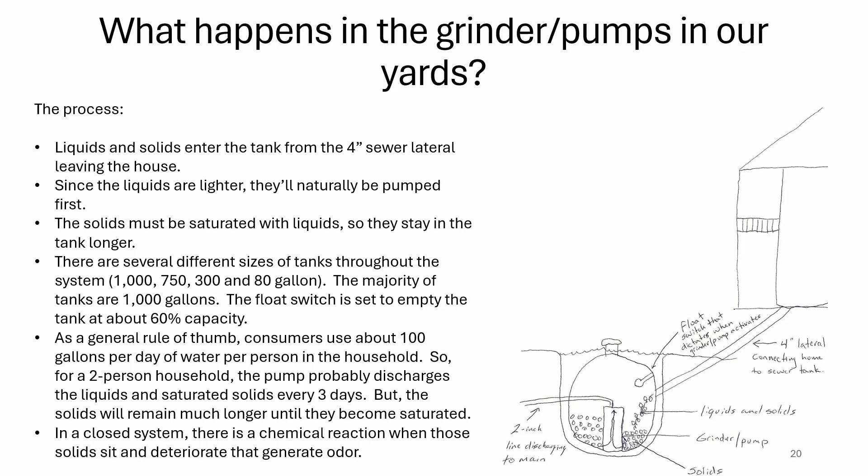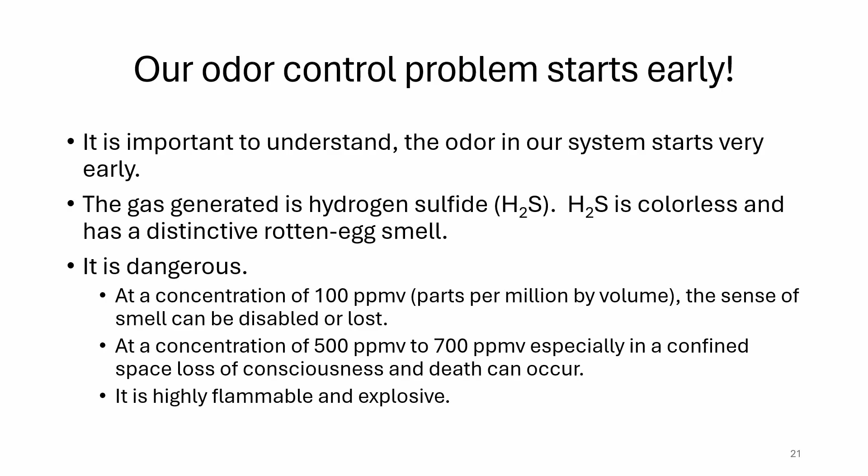In a closed system, there's a chemical reaction when those solids sit and deteriorate that generates odor. So our odor control problem starts really early. The gas that's generated is hydrogen sulfide, H2S. H2S is colorless and has a distinct rotten egg smell. It's dangerous. At a concentration of 100 parts per million by volume, the sense of smell can be lost. At a concentration of 500 to 700 parts per million by volume, especially in confined spaces, a human can lose consciousness or even death can occur. It's also highly flammable and explosive.

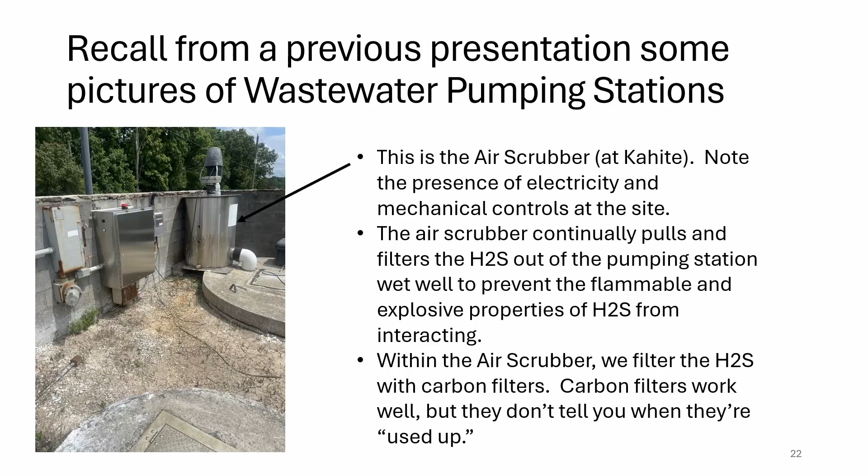Recall from a previous presentation some pictures of the wastewater pumping station. This is the air scrubber at Kahite. Note the presence of electrical and mechanical controls at the site. The air scrubber continually pulls and filters the H2S out of the pumping station wet well to prevent the flammable and explosive properties from the H2S from interacting. Within the air scrubber, we filter the H2S with carbon filters. Carbon filters work well, but they don't tell you when they're used up. They also treat H2S at a rate of significant deterioration. So the more H2S that's in there, the faster the carbon will expire.

And so part of the reason we get odor complaints is because we change the filters on a regular basis, but depending on how much H2S is in the system, sometimes those carbon filters will last 2 weeks, sometimes a month, sometimes 45 days, but they don't alert you to the fact that they've lost their carbon properties or been expended. And that's why we a lot of times encounter odor complaints. So do we have an odor control problem? Yes, and a lot of you probably knew the answer to that question.

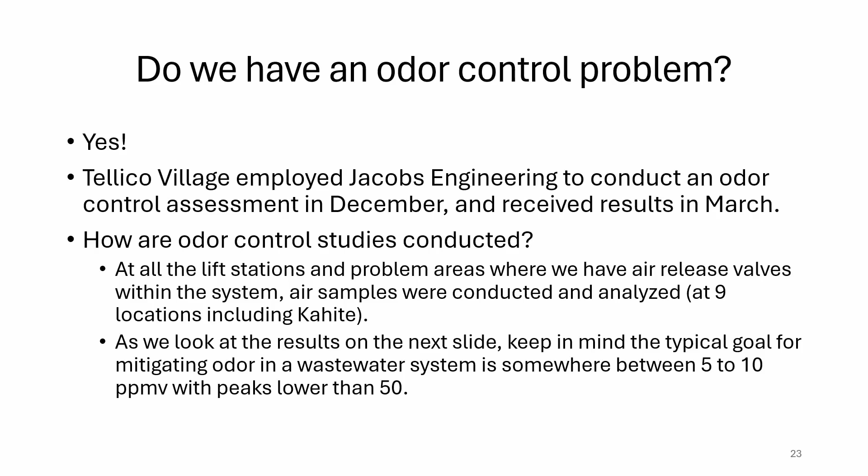So Tellico Village employed Jacobs Engineering to conduct an odor control assessment in December, and we received the results in March. So how are odor control studies conducted? At the lift stations and problem areas where we have air release valves within the system, air samples were grabbed and analyzed at 9 locations, including Kahite. As we look at the results on the next slide, keep in mind the typical goal for mitigating odor in a wastewater system is somewhere between 5 to 10 parts per million by volume, with peaks no higher than 50. So again, keeping in mind where we're trying to head, this chart illustrates what the grab samples are.

And really only at the Mialoqua pumping station are we at an industry standard level that you would say to yourself you don't have an odor problem. Now there is one difficulty with the data we're dealing with, and that is that warmer temperatures accelerate the chemical process generating H2S. So when you're looking at these figures, keep in mind January to February sampling will likely be the best case scenario for what you will see in terms of H2S at these sampling locations.

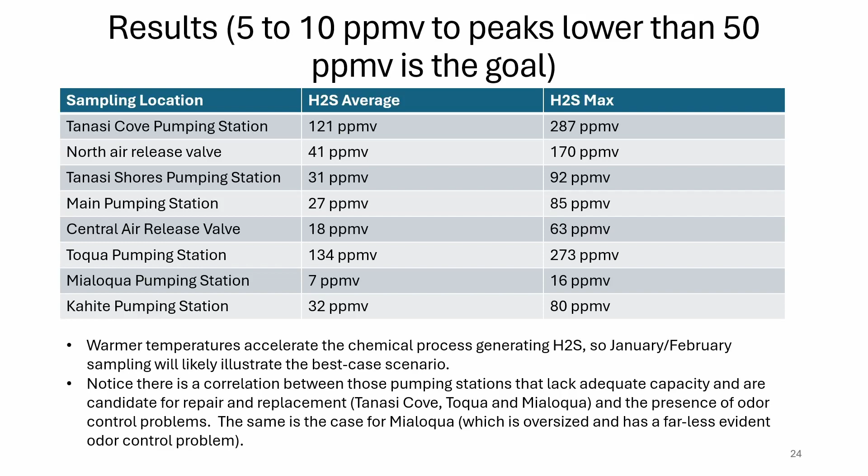And notice there is a correlation between those pumping stations that lack adequate capacity that we discussed in a previous presentation and the higher H2S, both on an average basis and in recorded maximums. So these pumping stations that lack capacity also have greater odor. Same's the case for Mialoqua, which we discussed is oversized and has far fewer odor control complaints.

So what do we do to mitigate odor control problems? There are three ways to address this issue. There's the vapor phase treatment, and this approach attempts to enhance the size and capability of the air scrubbers that we looked at pictures of at the pumping stations. So you're trying to catch it before it releases out.

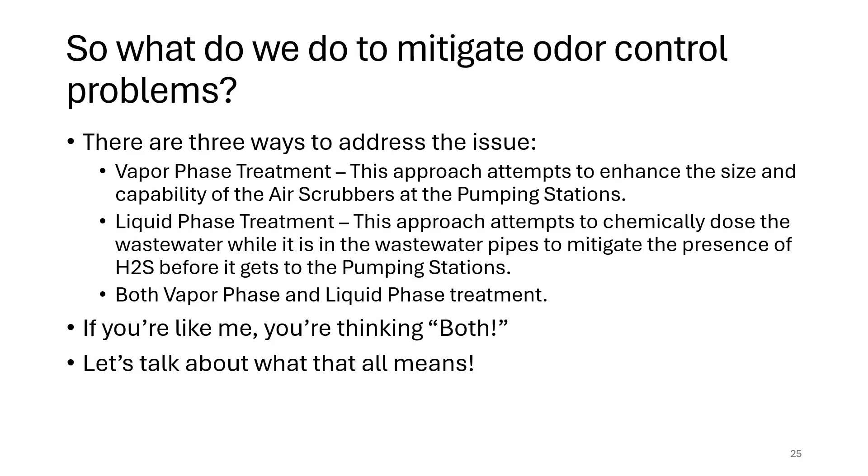A liquid phase treatment attempts to chemically dose the wastewater while it's still in the wastewater pipes to mitigate the presence of H2S before it gets to the pumping stations. The third is both. And if you're like me, you're thinking, let's do both. Well, let's talk a little bit about what that means.

6 vapor phase systems. So that would be one installed at Mialoqua, Tanasi Shores, Tanasi Cove, Toqua pumping station, the main pumping station, and the Kahite pumping station. These vapor phase systems would be better and more comprehensive, transitioning from just carbon to something called biotrickling and then carbon polishing. So we'd be working away from those filters.

For these systems, the capital cost for 6 vapor phase systems is estimated at $4.9 million. That's not 4.9 per pump station, it's 4.9 in total for 6 of them. And operations and maintenance cost is estimated at about $72,000 annually. Sized and implemented correctly, these systems will aim to reduce the H2S in the system by 99%, or put us in the range of 0.5 parts per million by volume.

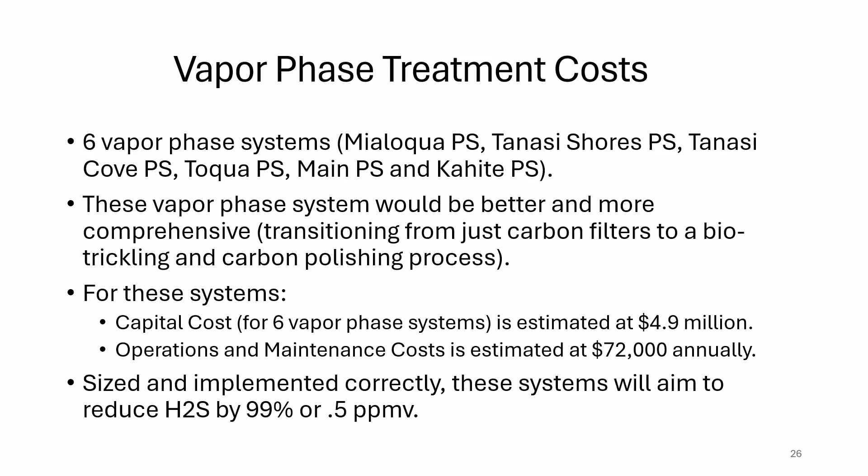Liquid phase treatment costs aren't cheap either. The liquid phase treatment attempts to address the wastewater after it's left the household wastewater tanks, but before the wastewater travels very far. Early in the wastewater journey likely means attempting to introduce liquid phase at the Mialoqua pump station and the Tanasi Cove pump station. At these pumping stations, chemicals such as calcium nitrate, hydrogen peroxide, or magnesium hydroxide are all candidates. For a number of different reasons, calcium nitrate appears to be the best approach.

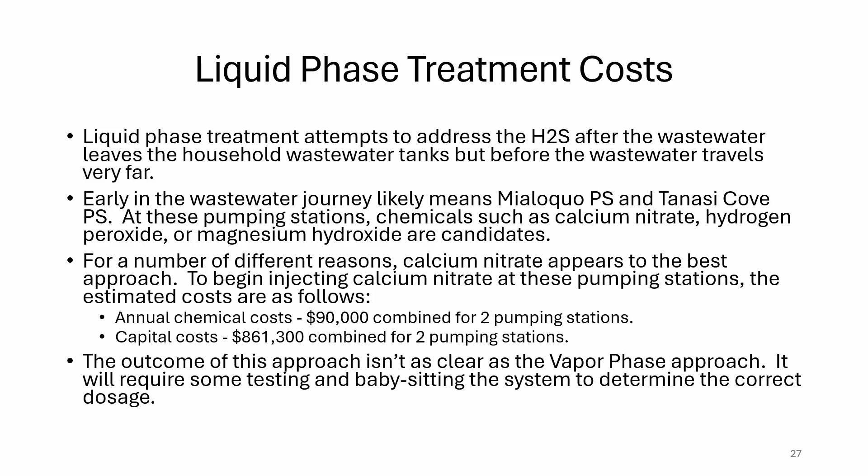To begin injecting calcium nitrate at these pumping stations, the estimated costs presume an annual chemical cost of about $90,000 combined for 2 pumping stations, and an estimated capital cost in the neighborhood of $861,000 for 2 pumping stations. The difficulty is the outcome of this approach isn't as clear as the vapor phase. It'll require some testing and some babysitting of the system to determine the correct dosage and ensure that what you're putting upstream is having a negligible effect at the next pumping station.

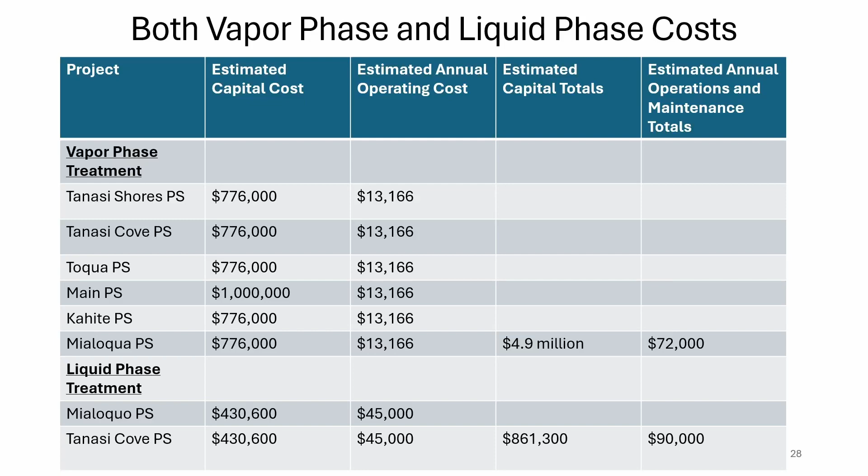So I just illustrated a chart and broke them down both by estimated capital cost and estimated annual operating cost, just to illustrate if you're thinking about doing both, which is a good comprehensive solution. You're talking about something in the neighborhood of about $5.7 million capital cost to install these features, and about another $160,000 a year, both to maintain the vapor phase components, which still have some technologies and components that will need to be replaced, as well as the chemicals that are introduced at the liquid phase treatment.

So there is a balance. Liquid phase treatment will reduce the presence of H2S at downstream pumping stations and at those air release valves. But consider all of this equipment, chemicals, and refined dosing. That's going to be new to us. We'll get there with the liquid phase. But whatever the liquid phase accomplishes will limit the extent of odor that needs to be treated at the vapor phase.

There's a conceivable solution that relies on 2 liquid phasing stations, probably at those same 2 pump stations, and a vapor phase solution consisting of 4 instead of 6. That reduces the capital cost by about $700,000, lowering it from about 4.9 to 4.2.

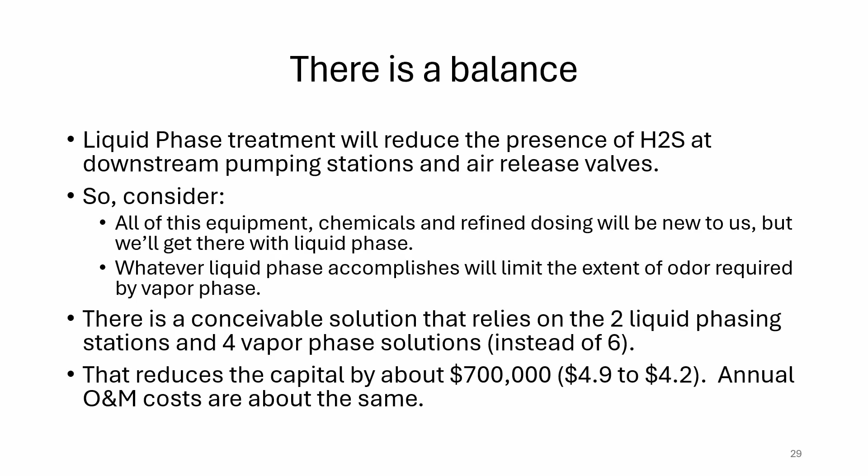Annual operating and maintenance costs are about the same. So really, even trying to do something of a hybrid approach doesn't really do it. You sort of need to make up your mind: am I going to rely exclusively on the vapor phase? Am I going to rely exclusively on the liquid phase, which will have lower costs? Or am I going to try to do a comprehensive solution, which carries with it some fairly significant costs?

So as it relates to odor control, some obvious questions. Is inflow and infiltration sort of helpful? Yeah. Unfortunately, the only mechanism available to dewater or clean out those household tanks is really inflow and infiltration. It has the effect of diluting the solids and moving the wastewater. So if inflow and infiltration assists with odor control, should we all stick a hose down in our household tanks and fill it up with water a few times a week? My answer to that is please don't do that. Inflow and infiltration introduces more problems in the long run than the limited benefit associated with odor control.

Another question: is there something residents can put in their household tanks that will assist with the liquid phase, i.e. knock down the H2S in the household tanks? Again, please don't do that. First, please don't open those lids. It stinks really bad, and I really don't want you to have that experience.

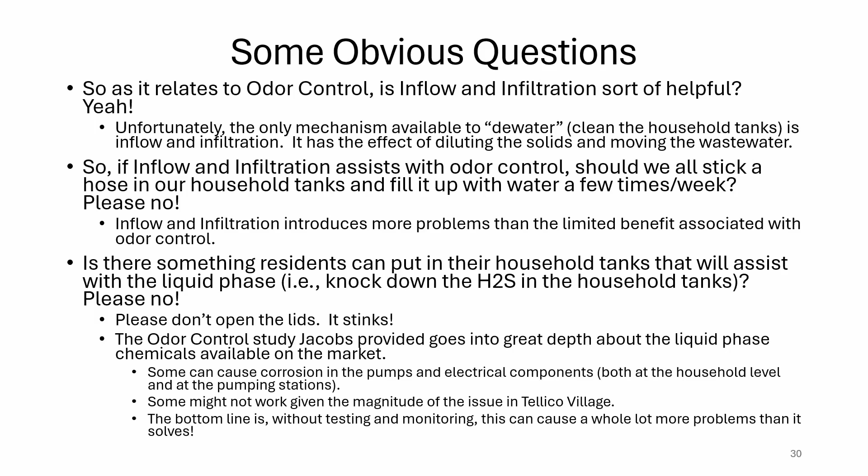But furthermore, the odor control study that Jacobs provided goes into great depth about the liquid phase chemicals available on the market. Some can cause corrosion in the pumps and the electrical components, both at the household level and at the pumping station. So while they may have some nominal effect related to the H2S, it can be harmful to the equipment. Some might not work in the magnitude of the issue we're talking about in Tellico Village.

Odor control can go first, no question about that. But there's a risk that by constructing these odor control facilities, we may end up doing it twice once the neighborhood pumping station is remodeled or replaced. On the other hand, the odor problem is clearly present now and it may not be feasible to delay to catch up with the neighborhood pumping stations. So that's an issue that, because we're at the master plan level, we need to study and consider our options. This issue will get sorted out. It'll be vetted by your Public Services Advisory Committee, your Finance Committee, and the Board of Directors.